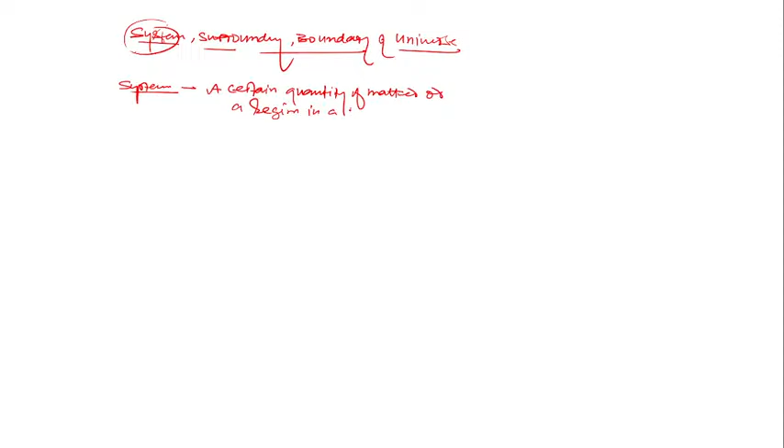upon which attention is concentrated or focused in the analysis of the problem, is called a system. So system is what? A certain quantity of matter.

Certain quantity of matter means, for example, let's say this certain quantity of matter is there, or a region in space. Let's say space is there, we are going to bother only about a small region, and our attention is concentrated only on that region. That's called a system. Is this clear? A certain quantity of matter or a small region in space on which our attention is focused or concentrated, that is called a system.

Anything beyond the system is called surrounding. Anything beyond the system is called surrounding. Clear? Except for the system, all the rest is called surrounding or environment. And the system is separated from the surrounding by the system boundary. So what is boundary? A line which demarcates the system from the surrounding is called the boundary.

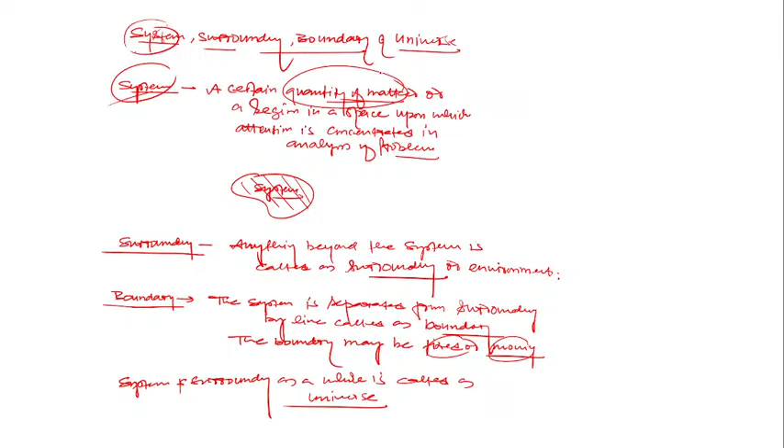So in a closed system, here you can see, because it is closed, no mass can go in and out. Anything beyond the system is called the surrounding, or environment. So no mass interaction is there. So in simple terms, this is the system, this is the surrounding, and this is our boundary. There is no mass interaction between system and surrounding, but there is energy interaction.

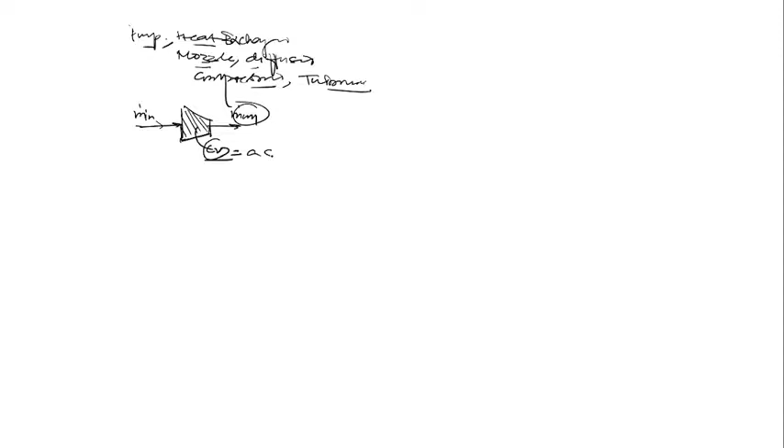Here volume is fixed. A control volume is nothing but a small region in space through which mass can go in and out. What is a control volume? A control volume is a small region in space through which mass can go in and out. So what is fixed here? Volume is fixed. While in a closed system, what is fixed? Mass is fixed. Clear?

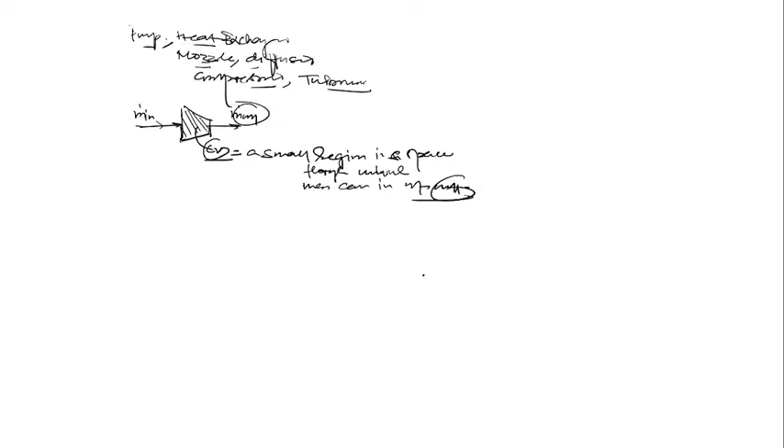But in a closed system, if mass is not allowed to go in and out, then obviously whatever mass is there, a certain quantity of matter, will be fixed. That amount is fixed. The amount will not change in a closed system. Is this clear? Now, isolated system. What is an isolated system?

The system having no interaction between system and surrounding, neither energy nor mass. A system with neither mass nor energy interaction between system and surrounding is called an isolated system.

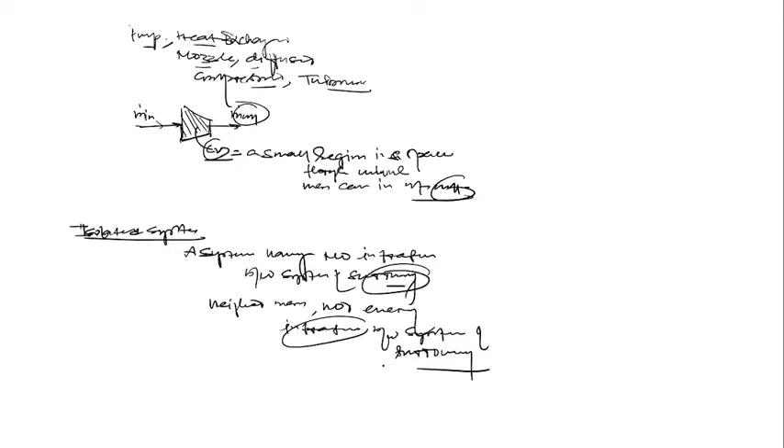It is of fixed mass and fixed energy. Its mass is fixed, energy is fixed, because whatever mass and energy is contained, it does not allow them to transfer. It is a fixed mass and energy. Is this clear? Any problem?

Now, thermodynamic properties. What are thermodynamic properties? Every system has certain characteristics by which its physical condition may be described. For example, physical condition means what is the volume, what is the pressure, what is the temperature. Such characteristics are called properties of the system.

So every system, either closed system or open system or isolated system, has certain characteristics by which its physical conditions may be described. For example, physical condition means what is the temperature, what is the pressure, what is the volume. These characteristics of the system are called properties of the system.

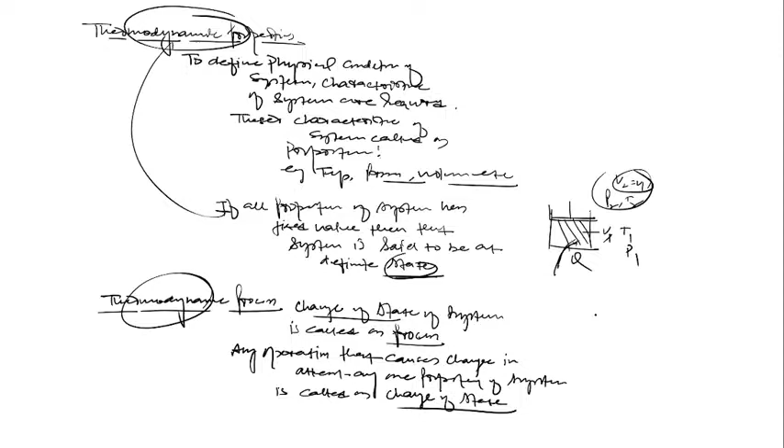What is path? The succession of states passed through during a change of state is called as path. The succession of state passed through during a change of state, because as the state will change, or during a process state will change, so whatever succession of states is there, that's called as path.

For example, if any process is, let's say from here it reached to here, this is the succession of change of state. The state of the system is changing, this process is changing, and that causes a succession of states, that's called as path. Clear?

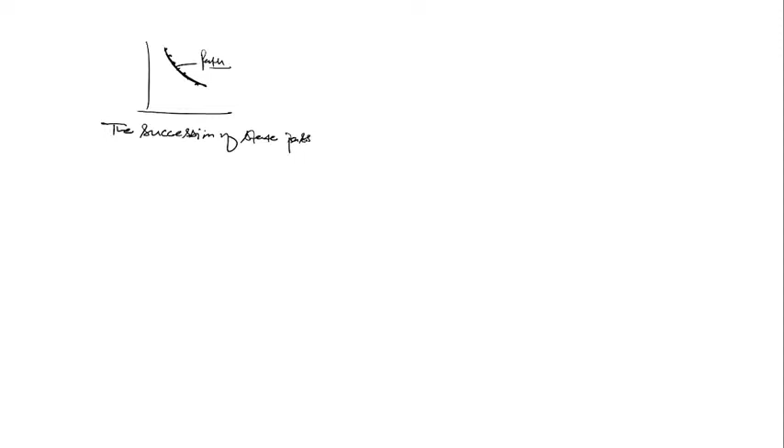So the succession of state passed through, the succession of states, this state, this state, this state, there are number of states 1, 2, 3, 4, 5. The succession of state, and state is what I told you, at every state the system has fixed value of properties.

What is state? Condition of a system is called a state, and any system is said to be at a state when it has fixed properties. So succession of state means the properties are changing, and that's called process. So during change of state, whatever the path has been followed is called as path. The succession of state passed through during change of state is called as path. Clear?

And when path is completely specified, means succession of the state is completely known to you, which path has been followed when the system reached from initial to final state. Suppose it's initial state to final state, right? The system was initially this way and now finally reached to this, and you know that the system reached from initial to final state through the succession of number of states, that's called as path.

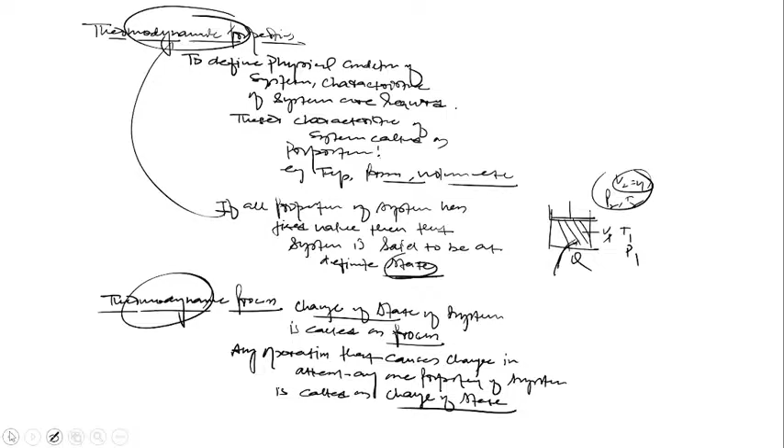Now types of properties. It's thermodynamic property I told you. There are two types of properties: extensive property and intensive property.

Extensive, intensive. Extensive properties are those properties of a system which depend upon the mass - depends on the mass. Intensive properties are independent of mass.

So whatever properties - temperature, pressure, volume, enthalpy, entropy, Gibbs energy and all - these all properties we can define in two ways: one is extensive, other is intensive. The properties which depend upon the mass of the system are called extensive, and which don't depend upon the mass are called intensive.

So what is the meaning of extensive? Extensive examples are volume, total enthalpy. For example, if mass becomes half - let's say here mass is m, when I divide it into two parts, m by 2, mass becomes half - then what about temperature, pressure, volume, enthalpy? Total enthalpy I'm talking about: temperature, pressure, volume, enthalpy, density, viscosity.

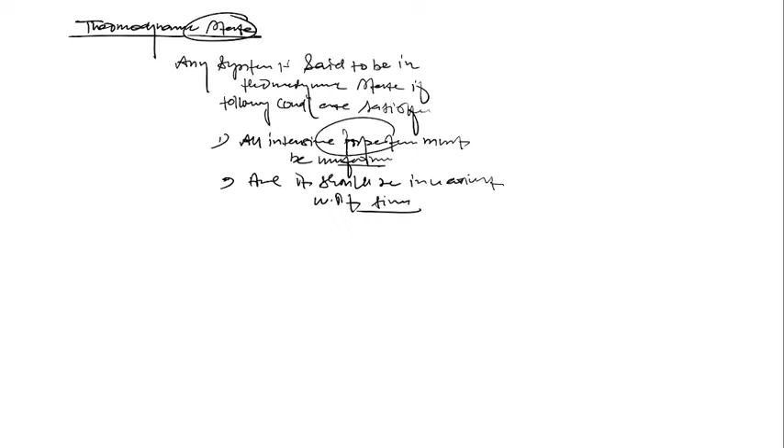Why am I talking about intensive properties, why not extensive? Because extensive property is a gross property. Volume is not the property of any point, because we can measure temperature at different points, but we can't measure volume at different points. Volume is a gross property, mass is a gross property, right?

That's why any system is said to be in a thermodynamic state if the following conditions are satisfied: all the intensive properties of the system must be uniform. Uniform means throughout, the same temperature, same pressure at each and every point. Temperature is same, pressure is same. Clear?

That's why the value will be fixed, because if you see the normal definition of a state - when all the properties of the system are fixed, that system is called a state. So when will it be fixed? Fixed means the properties must be uniform throughout the system - same temperature and same pressure.

It should not be that at this point there is a different temperature, and at this point a different temperature. It should not be there, because if it is there, then the properties are not fixed - the temperature is changing at different points.

The properties must be uniform and it should be invariant with time. Invariant means it should not vary with time. For example, let's say at this moment we find the temperature is 100, and at another moment we find it is 110 degrees Celsius.

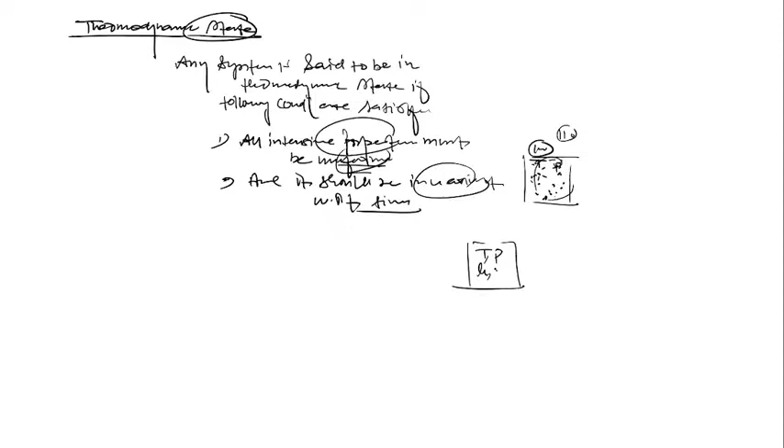So if any system has this temperature, this pressure, this specific volume, this specific enthalpy, or other intensive properties like density - if the temperature is same throughout, pressure is uniform, enthalpy is uniform, all are uniform and invariant with time, meaning they have fixed values, then this system is in a definite state.

My dear students, when the properties of the system are not going to change, it means the system is in a dead state, the system is in equilibrium. Yes or no?

By which condition are the properties of a system not changed? When the system is not going to interact with the surrounding, then only the properties of the system will not change. Now when the system is going to interact with the surrounding, its properties will change, and the changing of properties is called process.

When any process is taking place in a system—heat transfer, mass transfer, or any imbalance of forces—that causes a change of properties, and change of property of a system is called a process. I told you this previously. Change of properties, a change of state of system, means when the state of the system changes from T1 to T2, it means a process is taking place.

So now, by this definition, there is one confusion. Can I say only an isolated system has a state? Because in an isolated system, the system is not going to interact with the surrounding, then only the properties will not be changed. Yes or no? Because when the system is not going to interact with the surrounding in any way, then only the properties are fixed.

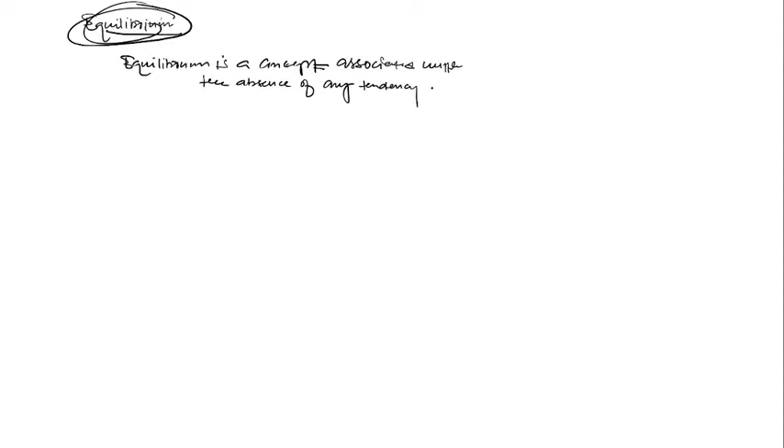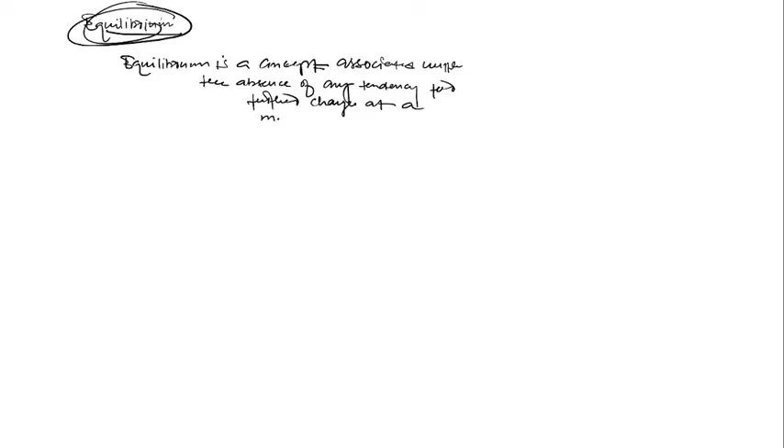Equilibrium is a concept. It is the general definition of equilibrium. Equilibrium is a concept associated with the absence of any tendency, with the absence of any tendency for further change at a macroscopic level. Clear? So this is our definition.

It is a concept which is associated with the absence of any tendency for further change at the macroscopic level. Clear? Means there is always absence of any tendency. There is no tendency for change. At which level? At the macroscopic level. Means as a human observer, we are not able to find any change. Although at the microscopic level there may be change, the gross behavior will not be changed. Gross properties. So what are the properties at the macroscopic level? Temperature, pressure, volume. They will not be changed when the system is in equilibrium.

And if there is no change in the properties of the system, it means at equilibrium, I told you, the system is in the absence of process, or you can say it is a concept associated with the absence of any tendency for further change. So there is no change in the properties of the system. If there is no change in properties, means properties are uniform and invariant with time, and that's called a state. So can you say in reverse every state is in thermodynamic equilibrium? Yes or no? Every state is in thermodynamic equilibrium, because the state definition is also the same. A system is said to be in a state when the properties are uniform and invariant. So at least for the moment when we define the system as a state, at that moment the system is in equilibrium with the surrounding. Yes or no?

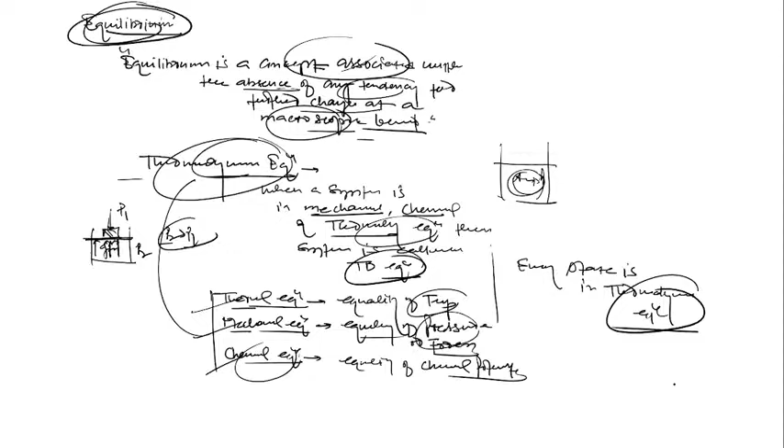So all the basics about thermodynamics I told you; these terminologies come up frequently. Now I remember. The next heading is state postulate, state postulates.

Write down. Anyone have an idea about this state postulate? Yes or no? What is state postulate? No idea?

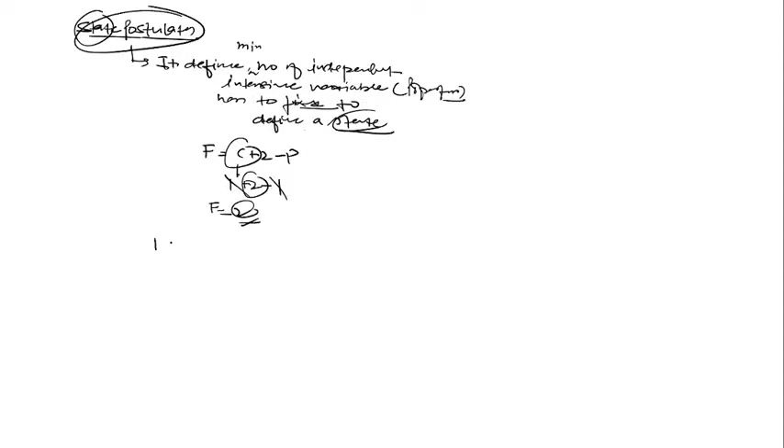From this, the state of a simple compressible system is completely specified or defined by two independent intensive properties. Clear? Means only two are sufficient, and that's why to define the state we should only know y and x. These two properties are there to define the state.

Once I know this y and this x, the state is defined, and all other properties we can define. So there is no need of defining all the properties to fix the state. Is this clear? If you have a simple compressible system, a single component system, simple means one component and one phase, then the degree of freedom is 2. It means only two independent intensive properties have to be fixed to define the state of a system, and by fixing the two, all other properties at that state we can define. Is this clear?

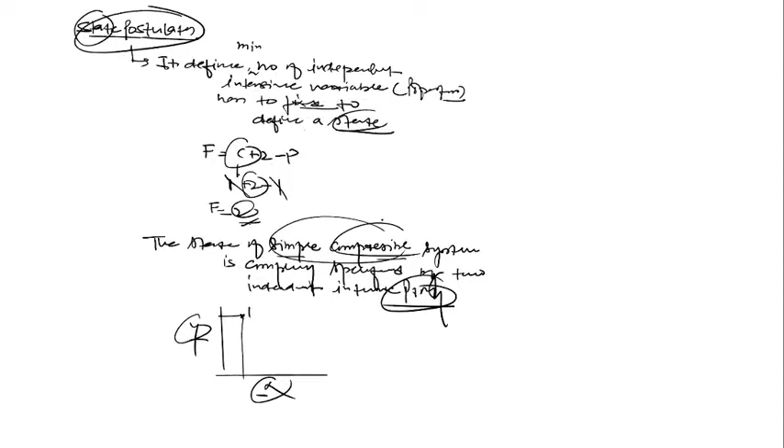So what is the definition of simple compressible? I will discuss. For example, if you have a piston cylinder assembly and nitrogen gas is filled, temperature is 25 degrees Celsius and pressure is, let's say, 1 atm. Only two properties are fixed, then I can find the other properties, because at a state all the properties are fixed.

So at the given state there are a number of properties: temperature, pressure, specific volume, specific enthalpy, specific entropy, specific energy and all. By knowing only two, we can find the rest. That is called the state postulate. That's why a two coordinate system is sufficient to define a state. To define state 1, we must know y and x, the independent intensive properties. Fix any two, and all other properties are fixed. Clear?

Similarly, at the other point, if we know this y and this x, I can find all other properties at the second state, and at any intermediate state, by knowing only two properties. So for a simple compressible system, only two independent intensive properties have to be fixed to define the system completely. Now the question is, what is a simple compressible system?

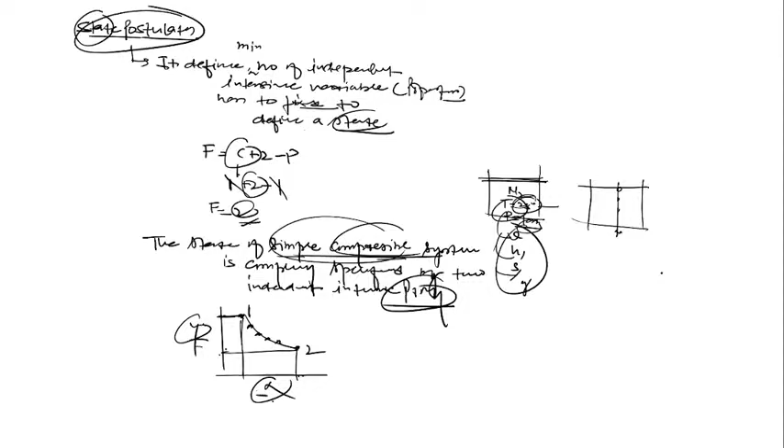A simple compressible system is in the absence of any electrical, magnetic, gravitational, motion and surface tension effects. We don't bother with gravitational force, because then pressure will vary with the hydrostatic head. From fluid mechanics we know dP/dz = rho g, the weight density of the fluid, pressure variation with depth.

Then one more variable has to be fixed. 3 variables will be required. Yes or no? Let's say the pressure is going to vary with depth here, then one more variable has to be fixed. So I am talking about a simple compressible system.

Note here, what is called a simple compressible system? A system is called a simple compressible system in the absence of electrical, magnetic, gravitational, motion and surface tension effects. These effects are neglected. That system is called a simple compressible system.

A system is called a simple compressible system in the absence of electrical, magnetic, gravitational, motion and surface tension effects.

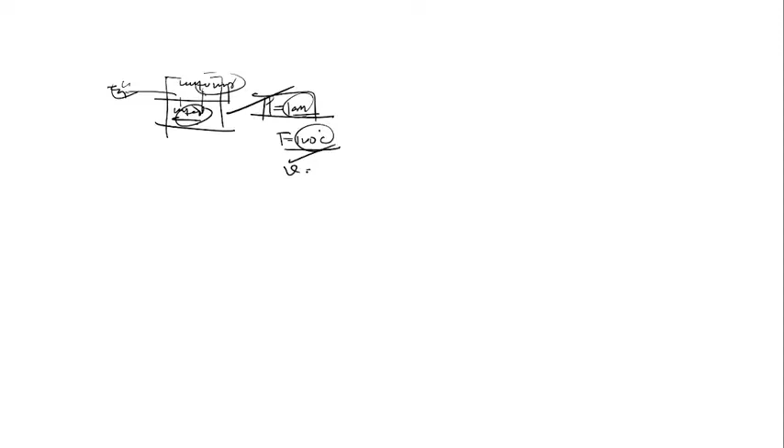For example, at the pressure of 1 atmosphere, if the liquid and vapor are in equilibrium, then what will the temperature be? 100 degrees Celsius? Yes or no? At the pressure of 1 atm, I only fix the pressure and I know the temperature. I can also find out the specific volume of the vapor and liquid. All the properties we can define from a steam table.

By only knowing the pressure of 1 atm, you can search the steam table for the temperature at which liquid and vapor will be in equilibrium: 100 degrees Celsius. Clear? Vice versa, if the temperature is 100 degrees Celsius, the pressure will be 1 atm. We can find the rest of the properties, entropy, enthalpy and all, by knowing only one variable. Is this clear?

This is called the state postulate. And that's why in a simple compressible system, two independent intensive variables are required. Please draw this figure: y and x are the variable properties, and when these two properties are fixed, I can define the state. Only two is sufficient. We could show all, but we would unnecessarily increase the complexity. If only two is sufficient, what is the need of defining all the others? Clear?

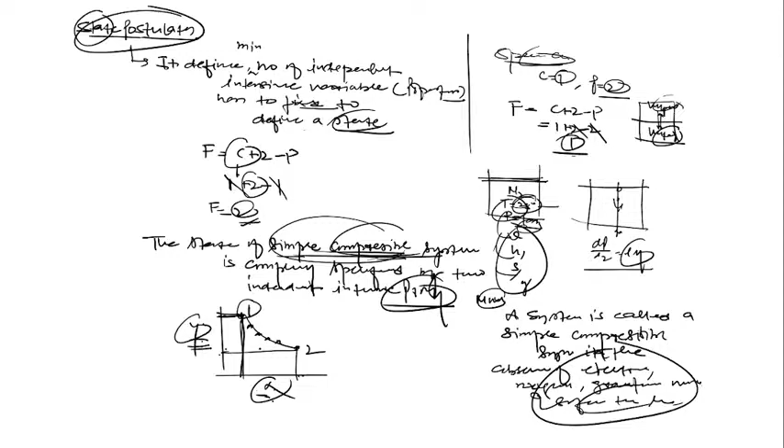This is the state postulate. Now, this is the quasi-static process, also called a quasi-equilibrium process. Does anyone have an idea about quasi-static?

Quasi means almost, and static means stopped. An almost stopped process, meaning a very slow process, is called a quasi-static process. Clear? And what is a process? Change of state. When the change of state is taking place very slowly, that's called quasi-static. Clear?

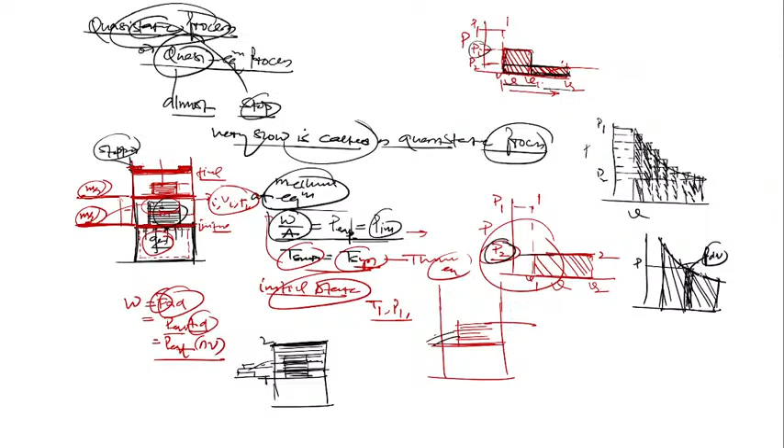This here is P, and this is dV, and the differential work is P dV, and if you integrate over the entire process, this will give you the total work done. Yes or no? Follow. So when I am carrying out the process in a quasi-static manner, what advantage are we getting? We are getting more work. Yes or no?

But the quasi-static process is an almost slow process, and this is actually called a thermodynamic process. All thermodynamic processes are quasi-static, because I told you a thermodynamic process is a process which takes place via an infinite number of states between initial and final. And this process is so slow that it is passing through an infinite number of states between initial and final, and each state is in thermodynamic equilibrium, means the system is in a position to attain the thermodynamic equilibrium condition at each state. Is this clear? Bolo.

If you compare, this is the work we got in the quasi-static manner. When I do the same process in the first case, when I remove all the weight at once, then I got only this much work, yes or no? Now the question is, what is the importance of this almost slow process? In real practice, in real conditions, is there any process which is this slow? Tell me please.

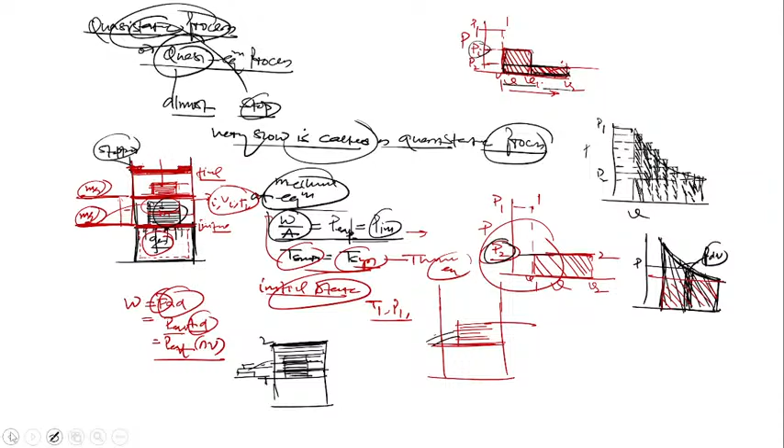When you compress the gas, same thing here. When you are going to put the weight, initially this is the condition. When you put all the weight at once, here weight were there - what happens? This will lead to the final state. It's the initial condition, it's the final condition. When you put all the weight at once,

the volume changes from V1 to V2. When you compress the gas, there is no intermediate state - it's P, it's V here. So the initial state is this one. When you compress the gas, this is the initial state: volume was high, it's V1, pressure was P1. That's the initial state.

When you put weight over it, it is compressed against the pressure of P1. Sorry, the final pressure is P2, and the final pressure is obviously more. So what is the second state? One state, second state, it's P2 here. And total work done is what?

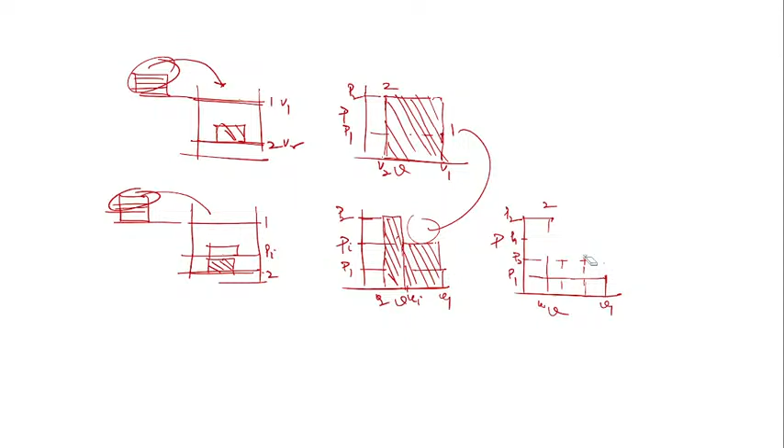In the first step I got this much work. In the second I got this much. In the third I got this much. Now you can see I have saved this much more work - less work is required. When I carry out the process in infinite number of steps, I get these steps of P into V from V1 to V2 through infinite number of states.

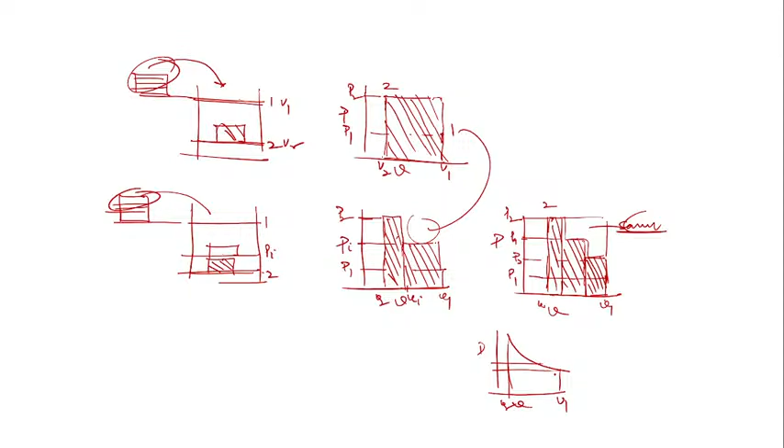This much area - is it clear or not? When I have infinite number of steps, I save this whole amount of work. So you can see when we carry out the process in a quasi-static manner, in compression the minimum work is required, and in expansion maximum work is produced. Both are beneficial for us, yes or no?

And that's why in the case of a work-producing system, when the process is quasi-static, in expansion we get the maximum work, and we get the minimum work when compression is there. Minimum work is required, maximum work is produced, and both set the reference standard for all actual processes of compression and expansion. Is this clear?